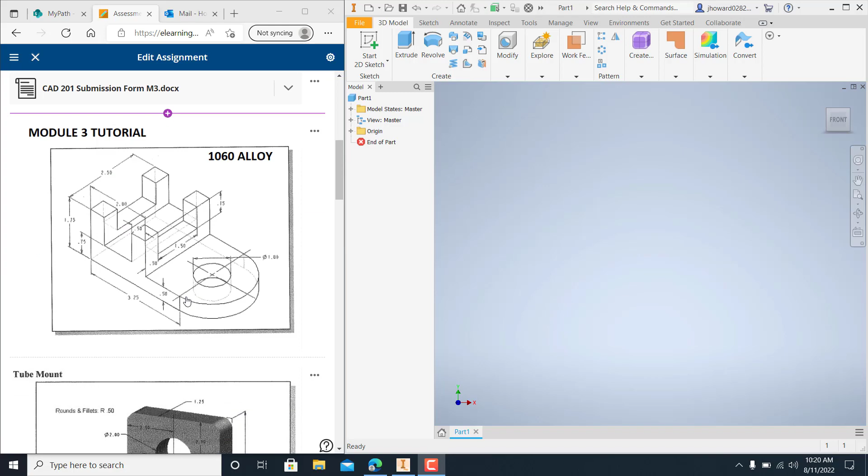Welcome back, folks, getting ready to jump in and do the transfer fork, and it's this one right here. After that, you've got one more—it's going to be this linkage of some sort. I'll let you guys get that figured out and draw that one up, see if you can figure it out.

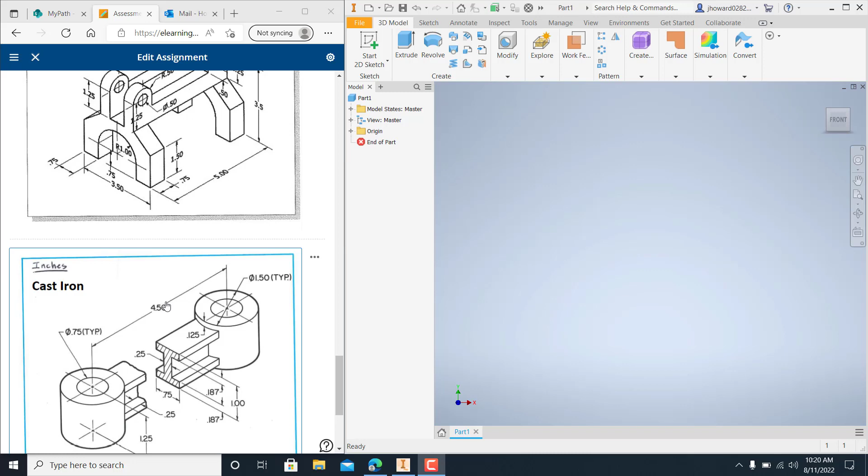But for this one, we are going to draw the transfer fork. And this is how I'd start this out. I just start a 2D sketch, and XY plane would be fine. What I want to do is... there's different ways I could go about this, a lot of different ways. I'm trying to think of the most efficient way that I can do it.

I can start from this side and build all this up, and then I can come to this front and start a sketch and then cut all this back. I think that would be it. Well, let's try that.

So I start here and I start there at that origin point. It's a really good point to start. And I want to draw the height of this all the way up here, down, and do this profile all the way over. Okay, and when I do that, I'm going to look at it here. Okay.

So I know all the way up to here, that distance will be 3.5 minus 1.25. So that'd be easy enough. So I'll come up here and just use your system, your software, to do the work for you. Minus 1.25 goes all the way up there at 2.25, and that would get you up to the top of this. And then I want to go on up 1.25 and then plus another half to get all the way to the top, which would be—and you don't have to do it like that, you can do it however you want. So I'm just going to add another 1.25 plus 0.5.

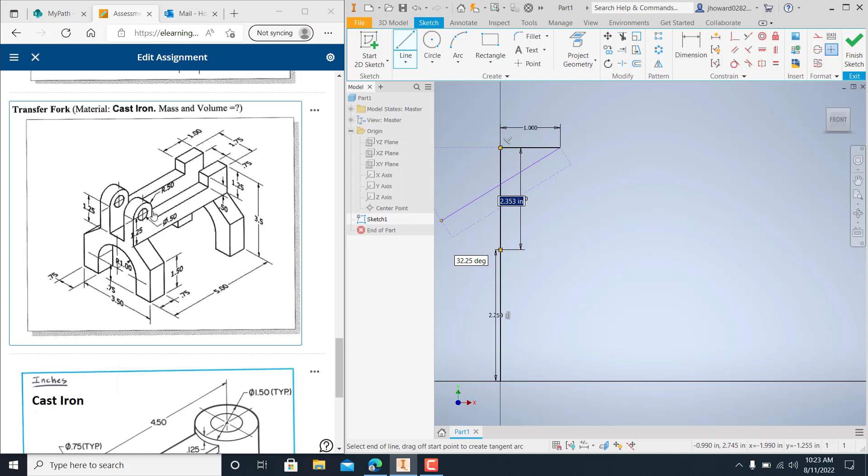That gets me up there. I want to come over. If this is a radius of a half, so double it to be the diameter, that'd be 1. And then I come down—I'm right now coming down to here, and we'll come over, up, and over. So I'm just roughly—I don't know where that would be yet, so I'm just going to put it right there for the time. I'm just roughly going to put all this in.

And the thickness of that is 0.75. Then up, come over—I'm not sure where that is, but I'll put it right there. Tie it all in. So now I've got to do a lot of dimensioning.

I know this is 0.75. Boy, it was close, wasn't it? That's 0.75. Overall, the whole thing is—it's 5, I'm sorry. Let's get 5 on there. So sweet, we got that. Up here at the top, that's 1 inch going all the way across. We can go ahead and knock that out.

1/2 inch tall here. All right, we are getting there, folks. And from top of this to this bottom should be 3.5. So that brings that down. And we'll also—this right here is going to be lined up with this. So we know what that is.

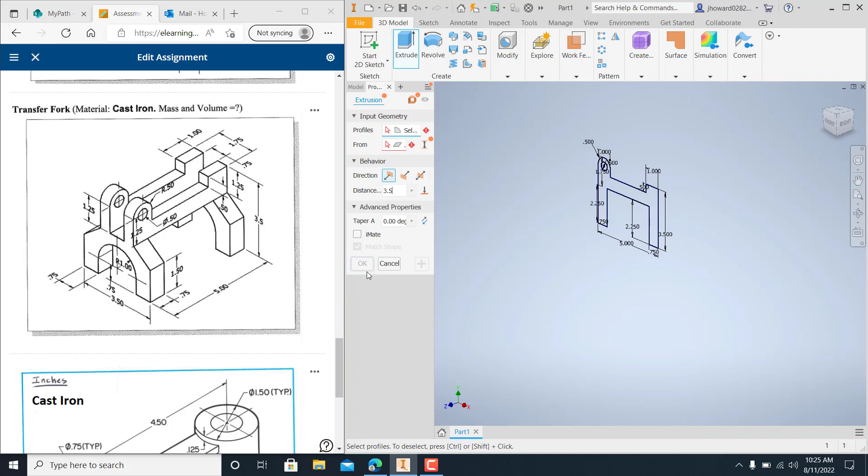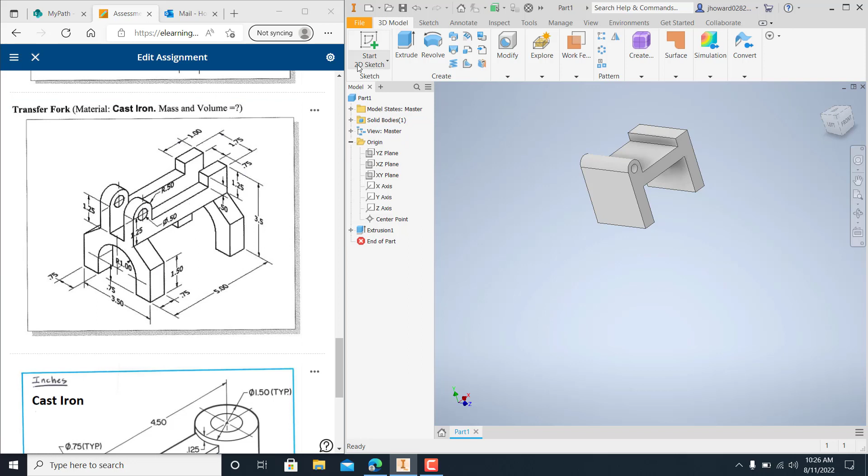And I'm going to extrude the whole thing. Gotta choose it first, don't I? So roughly this is what this thing is looking like so far. All right, so now we'll just go to the front of it and we're going to cut these sections out. Cut this out, cut this out, cut this all the way back out. So it doesn't look like it so far, does it?

But it's going to. So I get in here and I roughly just put this in, and I want to put me a line down. And actually I can click that point right there, because that is this line right there. So I can go there and click on it and then put me a line coming down this way. Then I can just go straight up with that line because I want to cut that.

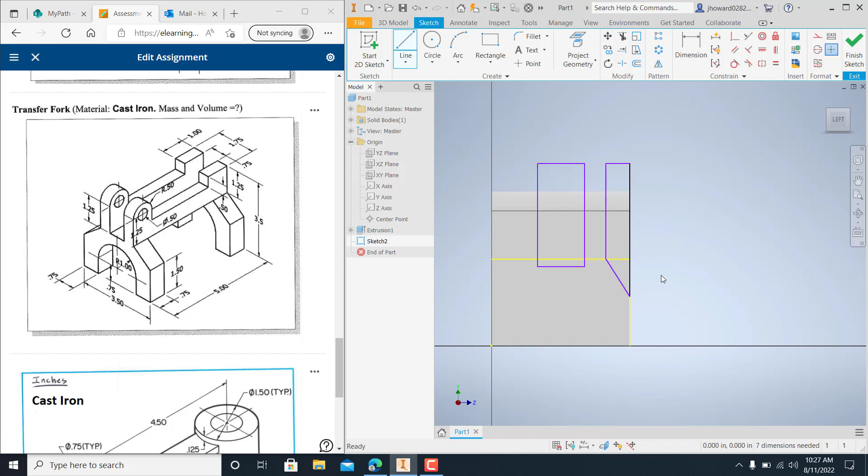All right, we're getting close, and that's 1.5 up that angle is. So I come off the bottom to that point right there. It's 1.5. And 1.5 cuts it over there.

All right, from the center point down, it's 3.25. So when I do a dimension, right there's the center point of it. Should be 3.25. And I might have to project the geometry just to get that right there, so I can do a little measurement on it.

1.75 would be correct, because if I'm going from the top of it down to that point, that's only going to the center point, and you add a half onto it, so 1.25 plus 0.5 would be 1.75. So that's accurate. Now I just got to get the width of this thing.

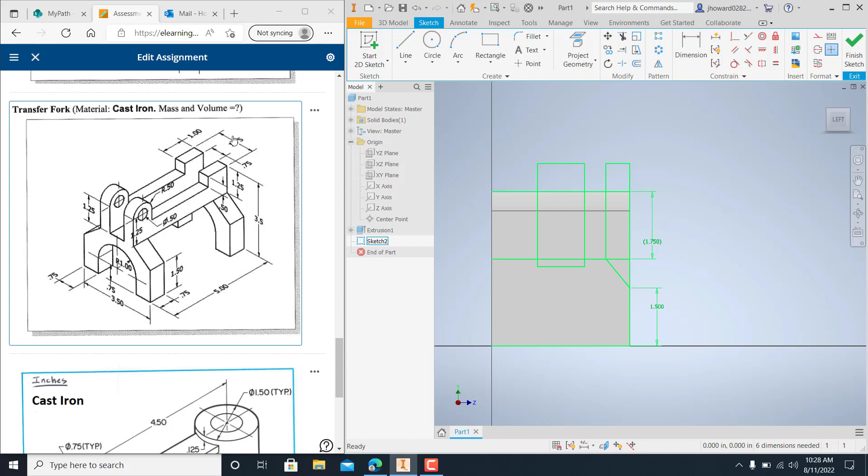And I can get it up here. This is 1.75 here from edge to edge. So what I need to do is put a line here, and I want to mirror this to the other side because I've already got it. My mirror line is that. Apply, done.

And that might not have been completely in the center because it looks like it's not cutting all the way out. So I want to undo that, and I need to check and make sure my line—that's the midpoint right there. Let's check it again and make sure we've got it right before we do anything else. So there's what I want. My mirror line is going to be this little guy there, apply it, and done. This time it's right on the money. So you got to watch out, make sure you're in the dead center.

Now I can put these other dimensions in. As you can see, 1.75, 0.75, so this would be 1/2 inch a piece, right? So this right here in between would be a 1/2 inch. This here would be 0.75, the gap in between. And of course, that would be the outside, that would be to that.

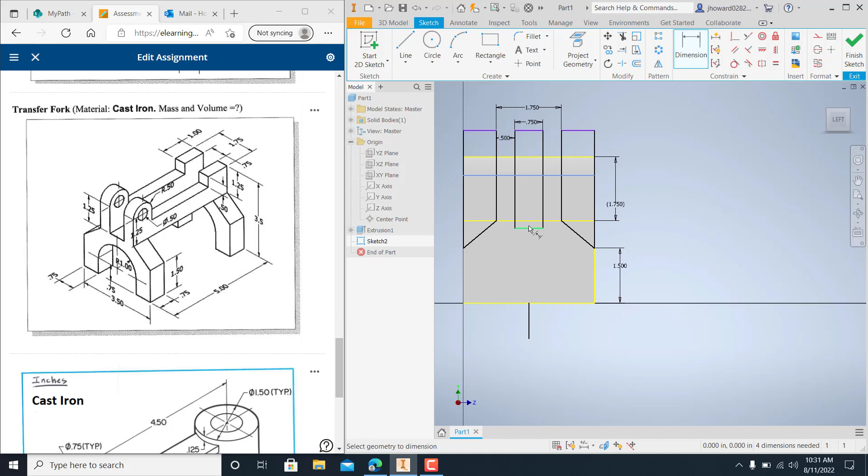Now you see this is going to be my cut, this is going to be my cut, this is going to be my cut. Now I got to figure out how deep I want this cut to be. It's 1.25 from the center point, which would be right there. 1.25, and it should line it up right there. It does. So these are my cuts, and I got one more cut.

I've got this little guy right here, and I find my center point. I bring it straight up. 0.75 to the center up, and then I've got two lines coming straight down on the sides.

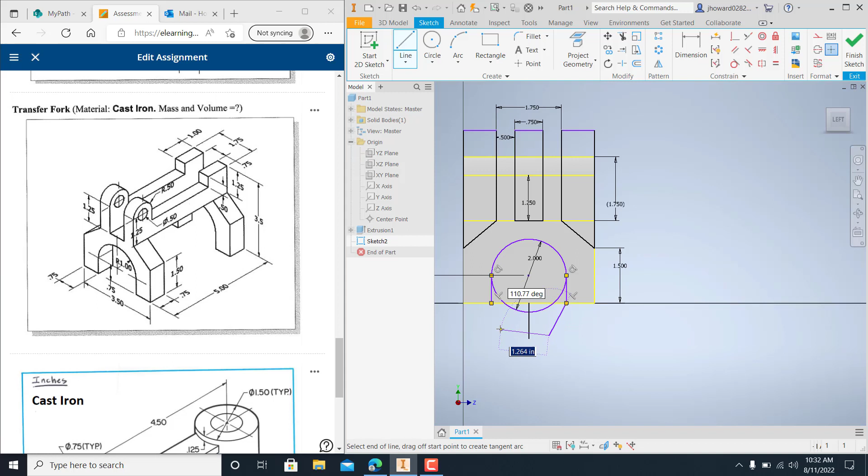All right, I think we've got most of it cleaned up. This was a tough one, no doubt about it. So all that looks really good. Just might want to go through and spot check your dimensions.

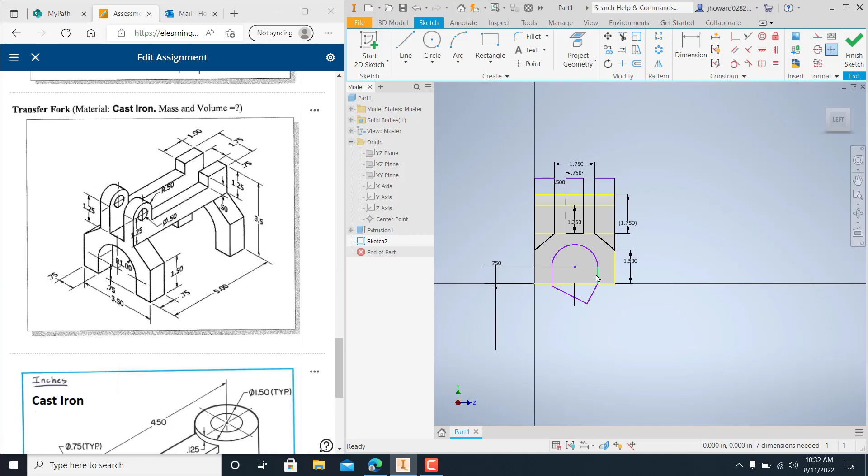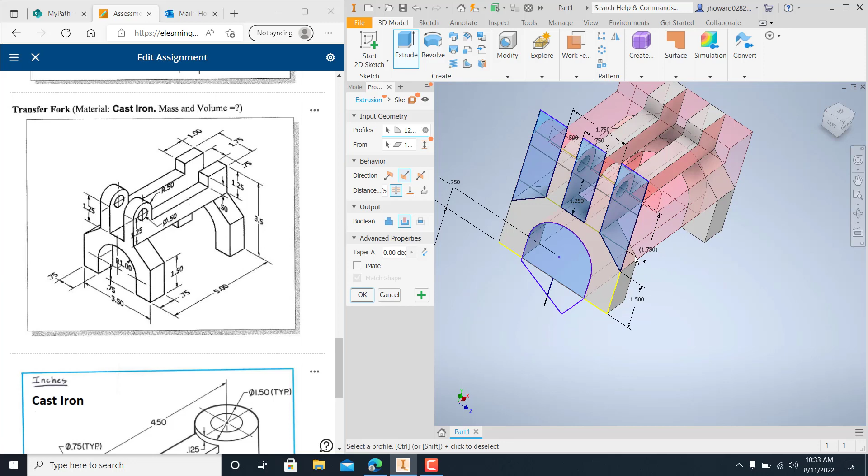Finish your sketch, extrude. I want to do a cut all the way through with that, with that, with that. That's all right with that. Catch the rest of that too, and that. Looks okay. So I hit OK on there, and boom.

There it is, in 2 steps we had that. But if it takes you more than that, it's okay. I'm trying to get you to think more efficiently—how fast can I do this with less steps?

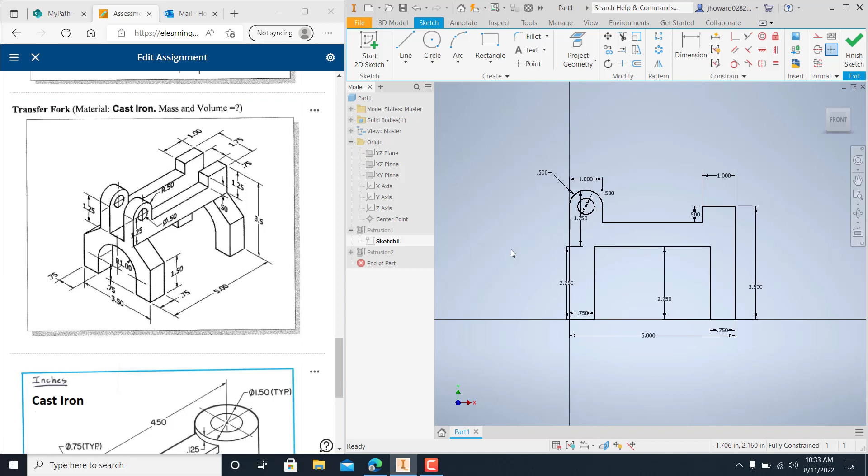And if you want to check something, I want to check the width of these. I'm not sure that looks right for some reason, but I'll check the width—0.75, 0.75, that is exactly it. 5 inches back, we're good to go on that.

So also this thing is cast iron. So right click on it and go to Properties, Physical, and we're going to switch this thing to cast iron. It gives you your mass, your volume, your area. Apply, and there it is, folks.

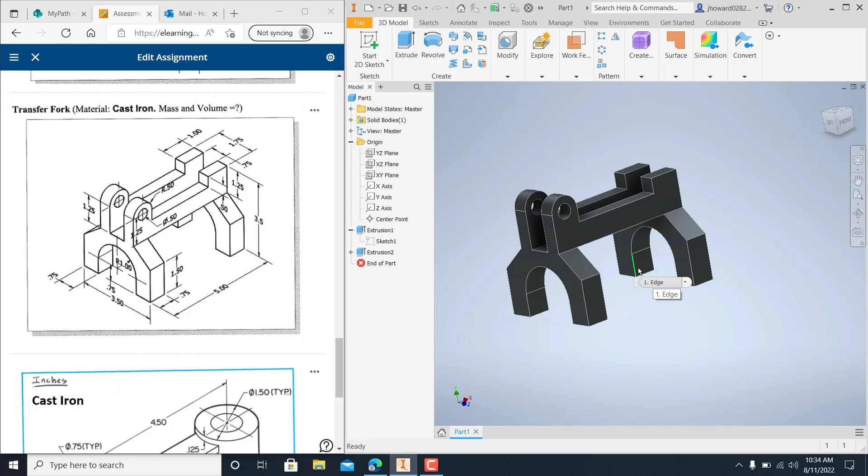So your last one, though, is going to be another cast iron part. It's going to be a linkage, and I want you guys to see if you can figure out how to do this one on your own. If you need help with it, I'm always here for you, so just let me know.